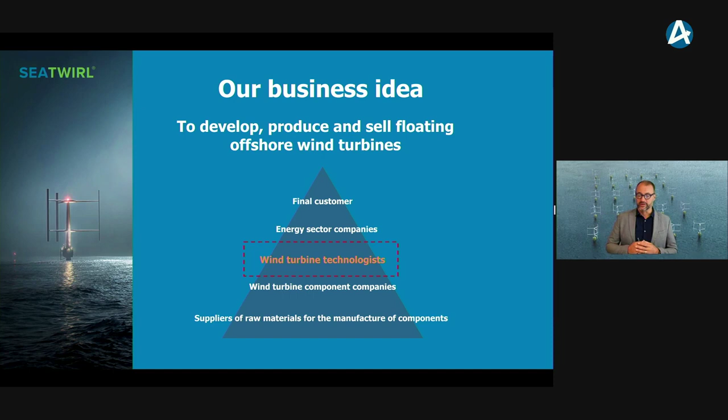So the key thing is, why wind energy? The main thing is that we have global warming and climate change, so we need to reduce the usage of fossil fuels. 70% of all greenhouse gases come from energy production. Renewable energy—as long as the sun is shining, you will have wind, and plenty of it. That's why we think it's the key component to reduce fossil fuels for the future.

The need for energy is also increasing, with estimates of 50-60% growth by 2050. Most nations have also agreed to commit to the Paris Agreement, committing to reduce greenhouse gases by 40% by 2030. In Europe, renewable energy is forecasted to be 90% of the energy mix by 2050.

And that's a big number. Most importantly, there is a cubic relationship between the wind and how much energy you can extract from it. So if it blows twice as much, you can extract 8 times the amount of energy. And that's what we are chasing, of course.

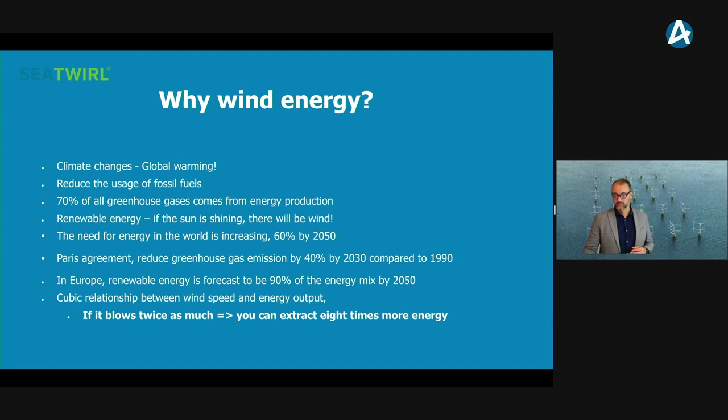The ocean covers 71% of the Earth's surface, so there's a lot of ocean out there. Floating structures can be placed in much deeper water than conventional offshore turbines, and there are tons of geographical areas where there's no location to build wind farms onshore—and also friendlier, out of sight.

We want the energy from the wind, but we don't want to have the wind turbines in our backyard. We can place them further out in the ocean, where we don't disturb people living close by.

Offshore winds are stronger and more frequent. We talk about the capacity factor, which is the average power output divided by the maximum power—how much energy is produced compared to its maximum. Typical factors: onshore maybe 30%, near shore 40%, but offshore we're looking at 50%.

Just imagine these turbines will operate for at least 25 years, so having that extra capacity factor for 25 years makes a huge difference—that's what we're after. It blows twice as hard, we extract 8 times the energy, and we also have a much higher capacity factor. That makes a big difference.

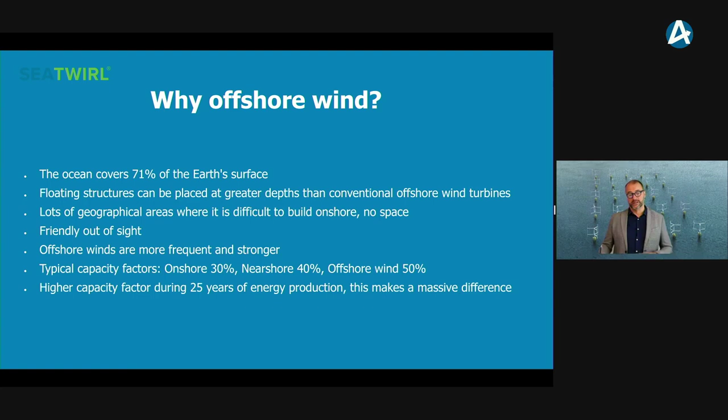Now, why use our vertical solution? We have a vertical axis wind turbine, designed for offshore from the start. That's important—a lot of solutions today are onshore solutions placed on a platform that simulates land, but it's a different environment out there. We started with the ocean, offshore, from the start.

We catch the wind from any direction, so we don't have to turn up against the wind or pitch the blades, which means less moving parts and less things that can break. Yaw and pitch—turning up against the wind and moving the blades—are among the biggest problems for service and maintenance, which is more difficult out in the ocean. So we try to build it robust, with fewer moving parts, and keep it simple.

We have all the moving parts close to the surface, and this is a key factor. We'll show you on video later that we have all the serviceable parts close to the ocean, so we don't need special vessels. We can use local labor or local content in the service contract, which is a big and important contract.

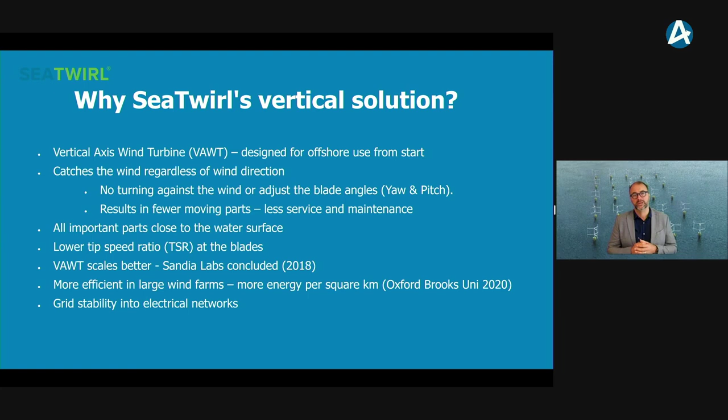Last but not least, when you have future energy systems with a lot of renewable sources, you're going to need support services. Support services means that the energy isn't always stable - electricity is going to start fluctuating. Because we have a big turning mass, the whole unit turns together, we have a big inertia, and we can actually provide grid stability in the future. We think that's going to be an important factor - not today, but for the future.

A few words about our solution. As I mentioned, we have a vertical axis wind turbine. The tower, shown in white, is connected to the spar, which is the floater. The floater works like a keel on a boat, and the tower and the underwater part rotate as one unit.

Michael, perhaps you can start the video.

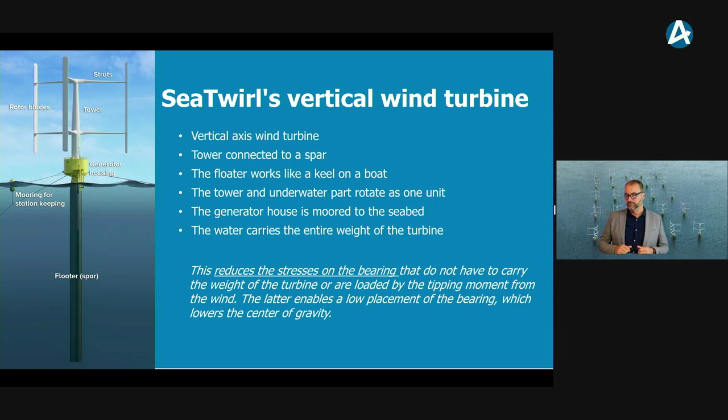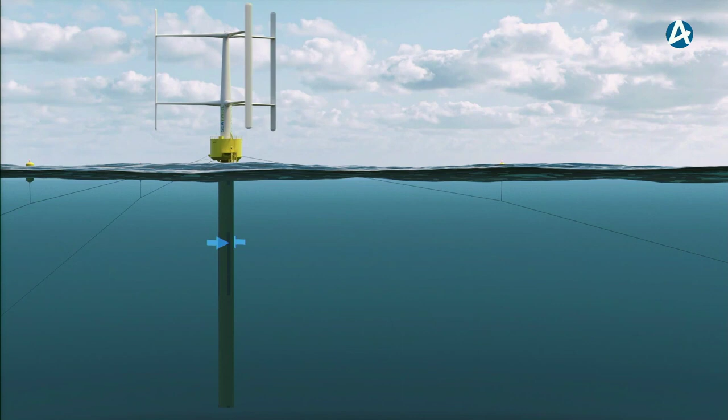As you can see, the generator housing is moored to the seabed. The generator housing, the yellow part I mentioned before - you can see we have the important stuff close to the surface, so you can access it quite easily with a normal vessel. You don't need a special vessel to access the top parts of the turbine. And the water carries the complete turbine - this is essential, and that's what I said: we build for the ocean from the start.

This reduces the stress on the bearing, which doesn't have to carry the weight of the structure, and it's not loaded by the tipping moment of the wind. When you get a lot of wind, the turbine wants to tilt in the other direction, and the bearing doesn't have to support that. That means we can build with a lower bearing and also have a lower center of gravity, which is important both for cost and for access to all the vital parts.

Okay, a few words about the report that came out last year. The vertical solution is more efficient in wind farms, and this is big news for us.

As the wind approaches the front row of the turbines in a modern wind farm, you will have turbulence generating downstream, meaning the turbines behind the front row will have not so stable wind blowing through. This is detrimental to the performance of the back rows, and it's called the wake effect.

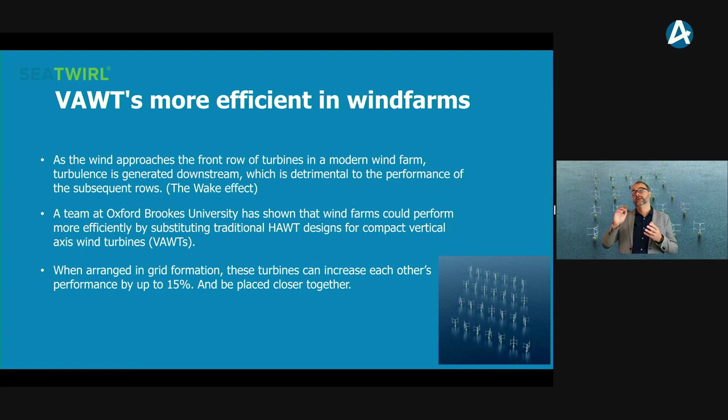The vertical turbines can actually help and support each other and make each other more efficient. If you arrange them in a grid formation, these turbines can increase each other's performance by up to 15%. You can also place them closer together. This is important because a wind farm developer wants to create as much energy in the location he has bid for. If you can place them closer together, you get more energy out of it, and also less cable between them, and it's easier to access when you do service.

So the lowest LCOE, that's the levelized cost of energy on the market, is our target, and it's the key. I think we can all agree that when we are back home in our house, we don't really think about where the energy comes from. We just want stable, good energy, not at a high cost - a very efficient, low cost.

So I repeat, we have designed for offshore wind from the start. We are more efficient in wind farms with the vertical solution. We have a lower service cost, less moving parts, easier access to the important stuff. And it scales better, meaning we can build bigger without such an increase in cost. We can offer grid stability.

And as I mentioned before, it blows a lot out there in the ocean. We at SeaTwirl really believe that we have the right technology and the team to win the race for the wind farms. And obviously, together with our team and our partners, we will do our utmost to prove that we are right.

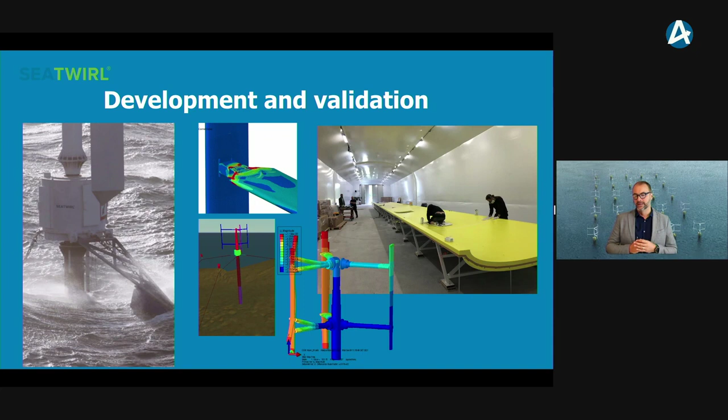I want to say a few words about development and validation. To the left you see the S1 outside Lysekil, but we've also done tons of simulation, analysis, and calculations, and created a lot of simulation tools that operate internally in the simulation world to make sure our construction works as we think. You can also see the mold for one of our blades - it's built in Sweden, and you can see the size is quite interesting, with people working on the blades giving you the proportions of what we're talking about.

But getting back to the team, they're continuously working on refining the design - reducing materials, making it lighter, making it more robust so we don't have future problems, but also developing simulation tools. That's developed in-house with our team, but also together with expertise in Europe.

We did a very important tank test before Christmas, at Chalmers University together with SSPA, and the results were really great. It showed that our wind turbine is operating within the limits we were hoping for. We had even been conservative in our simulation, so it operates better than we thought it would. So that was really good news.

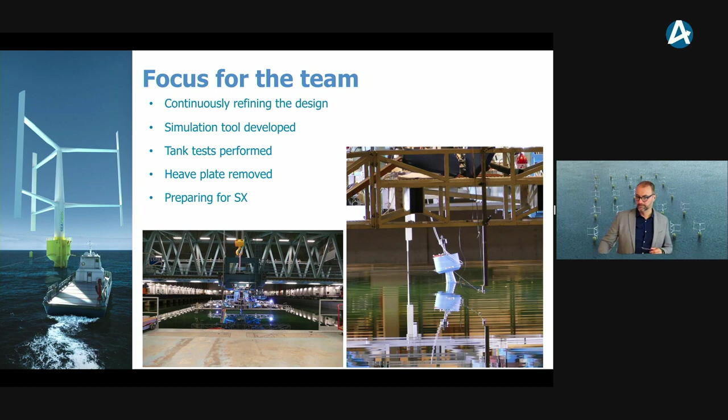Just a few words again.

The patent I mentioned before, since we have a unique solution that nobody else has done before, and now different research is saying that the vertical is perhaps the way to go for the future. We are sure it's the way forward. Therefore, more and more people are listening in and looking into our solution. And we will continue working closely with our IP rights and patents so we can keep the momentum and keep our developments in-house.